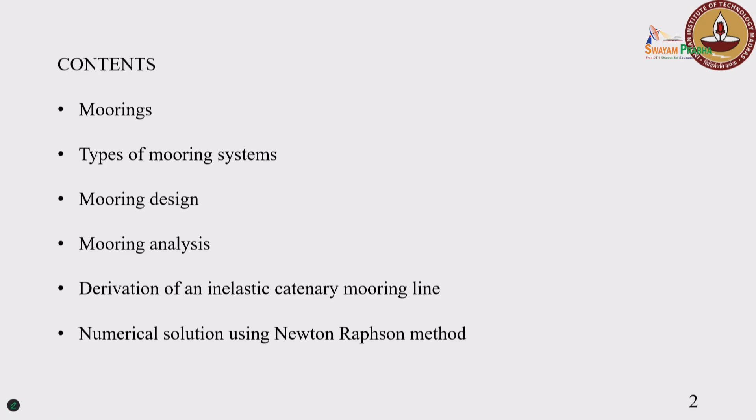So in this lecture we will be having these contents. We will have the moorings. First we will discuss why mooring is required, what is a mooring, and how to design a mooring, and how to analyze it.

And to make it a little interesting, we will have a derivation of an inelastic mooring line and why it is very important and how to solve it.

So finally we are interested in solving the problem, not just discussing the equations. So how a physical problem, when you have it, you convert to a mathematical sense and apply some method to solve it. This is one way to get started.

So this is not a complete part of the mooring itself. We just start with it, but then a series of lectures are required in order to discuss more, to get into the sophisticated tool development.

But then this is an introductory class, so we will have on moorings and why, and all those contents wise we will keep going. And why mooring?

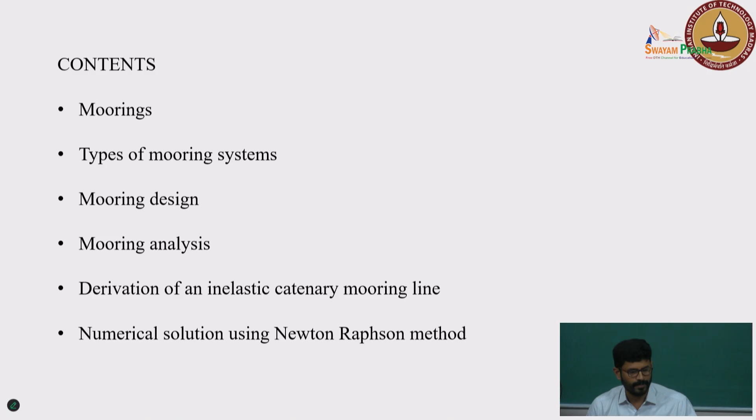So before we get into why mooring is required, in the last couple of classes, as we saw, a lot of wave energy converters we have been talking about. Depending on the types, you can see that oscillating type accounts for 78% worldwide, and OWC, which is the near shore one,

and submerged pressure differential overtopping devices. So it is very evident that oscillating type is much preferred, and presently on the worldwide sense it is 78%. And based on the location, if you see at the bottom, the offshore scenario is basically 64%.

So almost all of the floating wave energy converters, and even your offshore structures, everything is on the offshore.

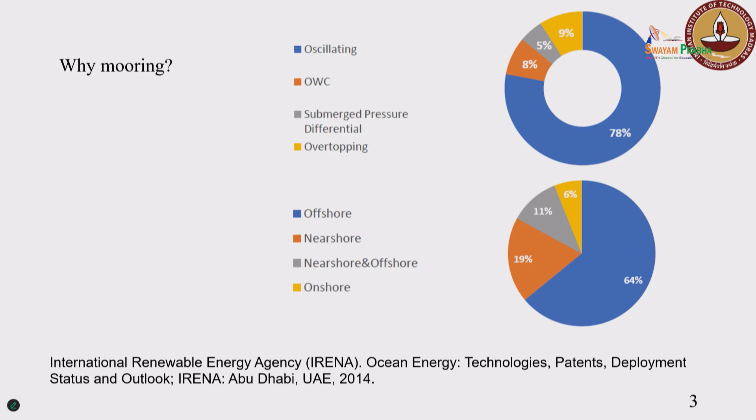So 64% is offshore, and near shore as well, considering the OWCs and other aspects, and there is always a transition from the near shore to the offshore and in between regions, and the onshore regions as well.

So at the end of this lecture, I expect everybody to know what is a mooring, why it is required, how to design it, analyze it, and if somebody gives

less inputs, how to start designing it. You should be able to get some reasonable numbers, and it should lead to a better path.

So offshore moorings, the fundamental role of a mooring is station keeping the floating structure. So I would say they are all the unsung heroes. Basically, many times when you see a floating structure, you don't see the mooring, which is just

like a duck, the legs you don't see, but that is what is helping us to keep it going. The same way, the moorings, the primary aim is to station keep it.

When we say station keep it, it is to keep it in place, but not so restrictively, but then it is a little complex and it can go around a particular range. So I have a nice analogy figure in the next slide, so that can give good clarity and keep

it intact. So moorings are an integral part of any offshore activity, starting from offshore drilling, production, transportation, maintenance, floating offshore wind turbines, and also wave energy converters.

In the last couple of lectures we have spoken more about the wave energy converters and how a physical problem is transferred, and we are mostly talking about the body interactions and setting up the equation of motion, but nowhere we are talking about the moorings coming into the picture and its contribution to the overall response.

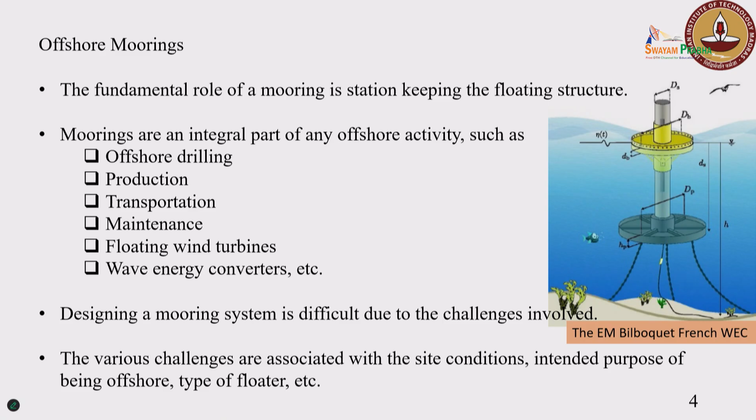So depending on the site conditions and the metocean data, what is the wave height at that location, what is the time period at that location, what is the current - the last session also we were talking about the currents. So it depends on a couple of parameters, and the challenges are there as well.

An analogy, just for keeping us grounded here: this is what we might have seen in our villages, wherein you have a cow and a rope which is tied. Basically, when we tie a cow, we are restricting its motion, restricting it to go around a particular point, correct?

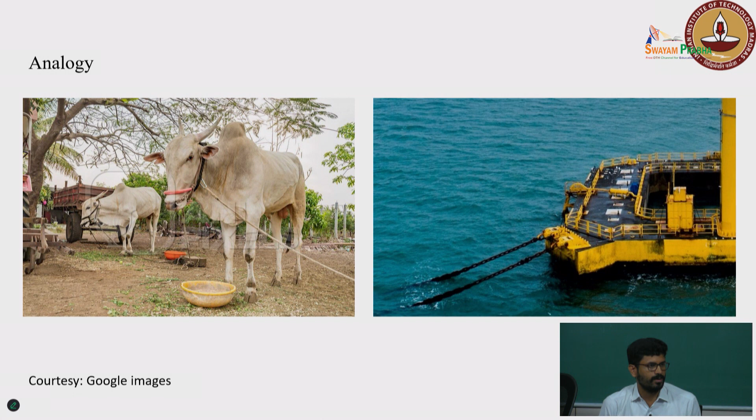So in the same way for our floating structures, for your mooring, one end is connected to the floating structure, the other end is connected to the seabed. And how you make a connection and what are the different compositions, for example in the same figure you can see a wire rope is given. If you put a chain of a very bigger size, your cow cannot take the load, correct? So depending on what type of structure you handle, your composition of mooring will also play a role.

So now we understand that during its course of time, a floater excursions basically means it will move around during its service. So mooring lines are constantly changing their positions as a function of time. That is what we call a watch circle. The watch circle is the extent to which it can go, the circle that it forms — the floater's excursion from the mean position.

For example, on the right side you have a drilling rig and a riser. Generally for drilling operations we don't use moorings, we have a separate item, the dynamic positioning system, wherein you bring in thrusters to keep it in place. So either by having thrusters or by moorings, you restrain the structure in place. So to station-keep a floating structure we can use a mooring or a dynamic positioning system.

It depends on the type of application, whether you want to go for drilling or for production activity. For production activity, basically for 20-25 years is the service life. You start drilling — it's like constructing a home, hardly 6 months, right? So the drilling operation also generally happens for 6 months. After that, for the next 20-25 years you are going to stay there, doing all your operations and extracting oil or hydrocarbons.

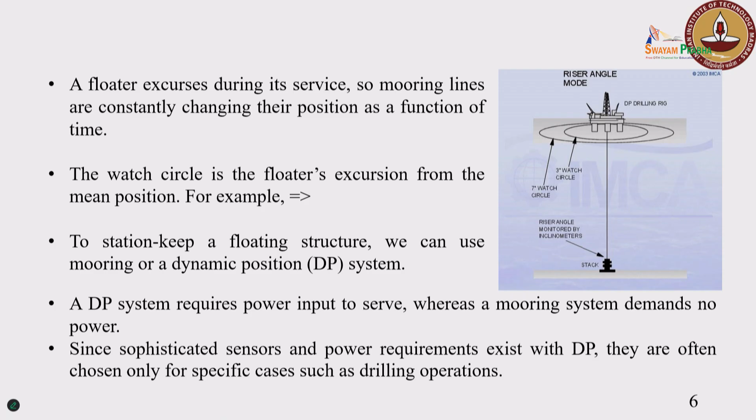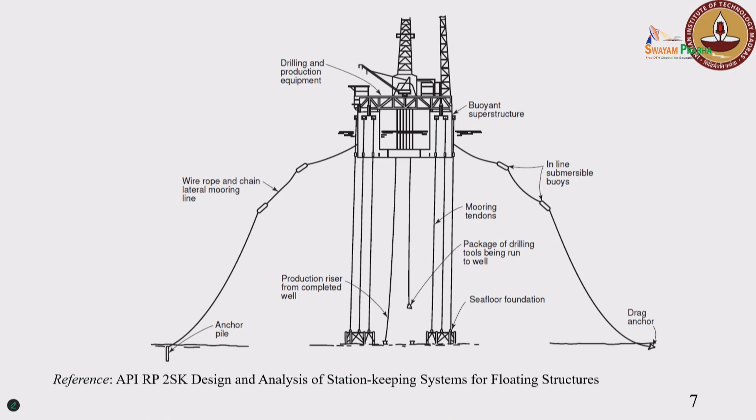But there are some places wherein combinations exist — with dynamic positioning you also have a mooring, depending on the type of requirement, and all these are site-specific activities. Some pictures for interesting things: it's not always that you have a simple catenary mooring or any one, they also come in combinations. That's what we wanted to say, and the reference is also given here.

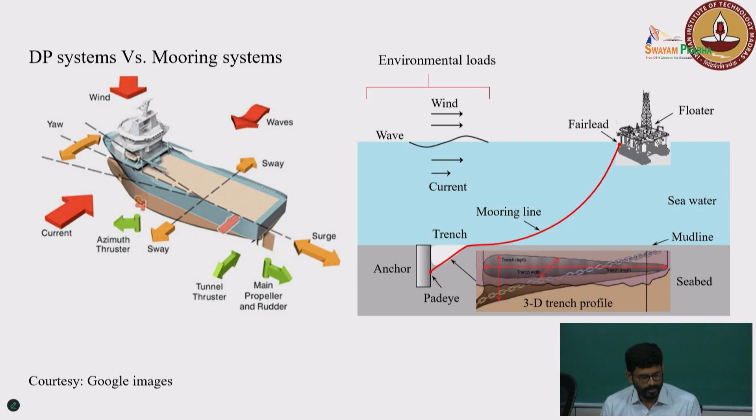So just a quick comparison of the dynamic positioning system with moorings. For the dynamic positioning system, we said we have some thrusters which keep it in place — it senses the direction of the wave and also the wind direction, and based on these inputs the thrusters adjust the power such that it will stay in place. So here we understand that for any offshore structure we have environmental loads: wind, wave and current.

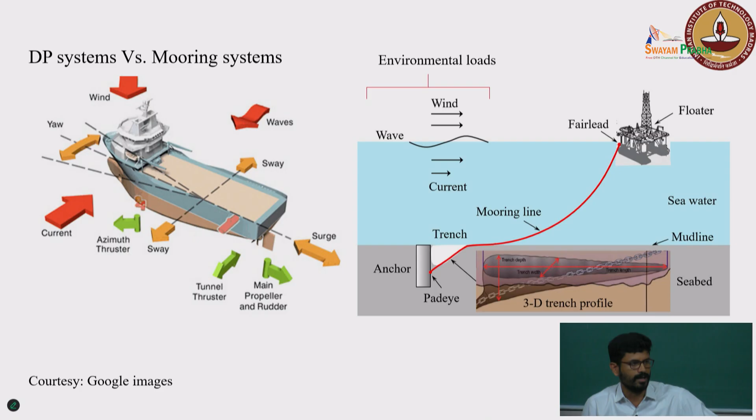You have a floater, and for a mooring, one end is connected to the floater, the other end is connected to the seabed. The one connected to the floater is what we call the fairlead, basically the top point. The other end touches the seabed, runs a few kilometers or a few meters on the seabed, and then terminates with the anchor. That is how it is generally done.

So the mooring limits the floater's excursion to ensure the safety of other systems, because when you are dealing with a floater, it is not just your floater alone. For example, you have an oil and gas platform - it is not just the moorings alone, it is primarily aimed at having other risers and umbilicals taken into picture. So they have some limitations, because of which your floater, though it can go a little bit forward, it can excurse, but then it is restrained.

The moorings are generally designed for various conditions, from harsh environments like the North Sea to mild environments, like the Gulf of Thailand or offshore West Africa. So different regions have different metocean data, and based on that only the moorings are selected.

So as of now we know what is a mooring and why it is required. Moorings are primarily meant for station keeping, and the design basically depends on where it has to operate. So the mooring types are based on the following, and also whether you are going to have it for a shorter time or for a longer time duration.

And also the profile, whether you want to have a catenary mooring or taut mooring. So it is basically an iterative process - we don't stick to any one. You start with one set of physical parameters, then you iterate it. Profile wise, we have the catenary and the taut, and also there is one more, semi-taut.

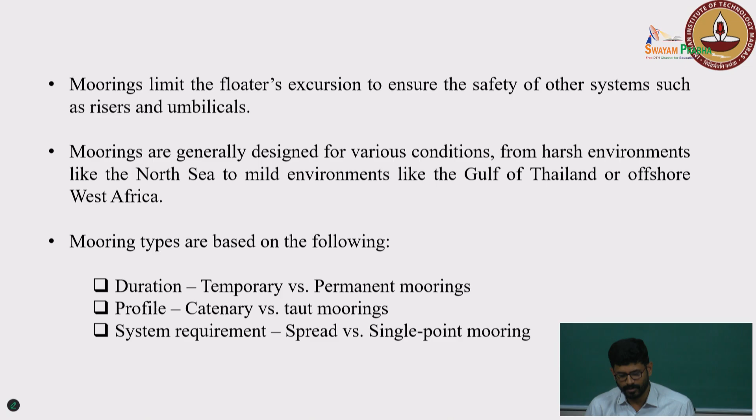System requirements as well, the spread and single point mooring. So mooring type based on the profile, you can see catenary versus taut moorings. For shallow waters, much of the time you see a catenary mooring. So when you have a floater and there is a set of lines which is running from your floater to the seabed.

So why is it taking a catenary shape? When I am just going to hold some kind of a line here, for example this line, it is basically taking some shape. Why is that? Because of the self weight. But in case of these, these things are already submerged in water completely. So it is basically the submerged weight in water, because of which you are getting the catenary shape.

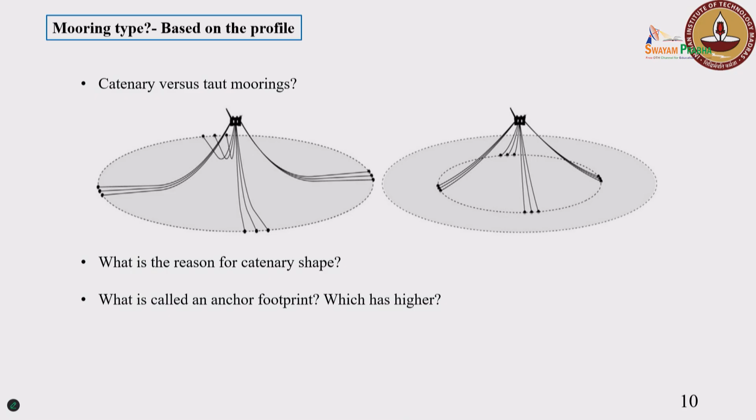And what is called an anchor footprint. So now we discussed about watch circle, which means that it can, as the cow can go around that point. And where it is connected, the end A is connected to the floater, the end B is connected to the seabed, and it is all connected. If you see it in a plan view, you basically have some circle, what we call an anchor footprint.

Okay, so now there are a lot of new terms coming up: watch circle, anchor circle, and what has to be the composition of it, and how to choose all these things. So that is a question now. We have a lot of things to play with, and whatever you choose is a correct one or not, we actually don't know.

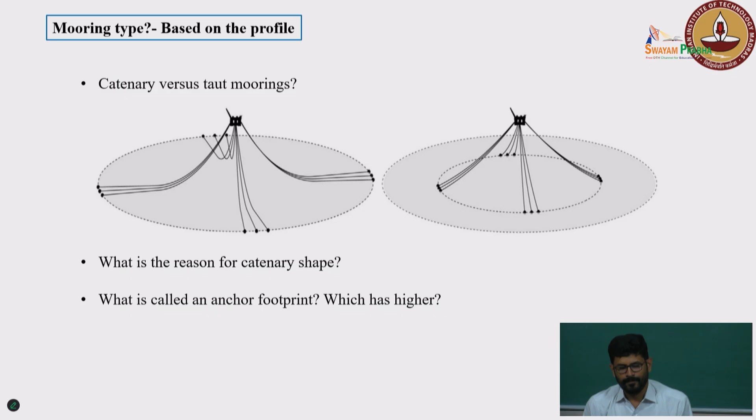We start with some physical parameters, then you go for iteration, then you say that it is satisfying all my requirements, and it is also cost effective. Finally at the end of the day, what we want is to invest less but no compromise in the performance, correct? Whenever you purchase a product, the same mindset - you want to invest less, but then the performance should be great enough. The same procedure goes in the mooring design and analysis as well.

So now we will quickly see what are the different types and why different types are there, and on what basis you choose this. So spread versus single point mooring. Spread mooring generally for the permanent - when we say permanent, nothing is permanent basically - so the 20 to 25 years service life, that is what we call a permanent activity.

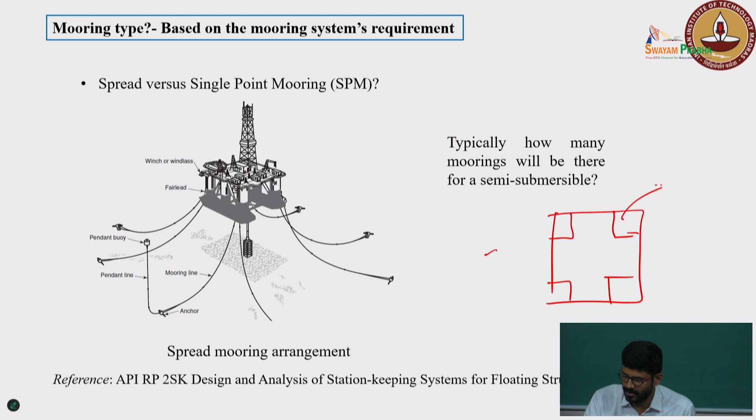So typically how many moorings will be there for a semi-submersible? For example, let us take, you are aware of semi-submersibles - basically a floating structure with columns and pontoons. So let us take, if you have 4 columns, for example, let me put it in the plan view. So this is basically your columns in the plan view. And now if I don't have any moorings, over a period of time they get drifted off.

So I need to have some moorings in place. So now how to put a mooring here? That's a straight question. So when a layman starts thinking, we initiate the same way, but then we refine it, correct?

So now either I can have 1 or 2 moorings per column, correct? If I am going to have only one, so it will be 4 cross 1, right? 4 columns, 1 per column. Or I can have 4 cross 2, 4 cross 3, depending on the requirement. So what will happen if I travel this way, 4 cross 1 to 4 cross 3? If I go for 4 cross 3, it will have better performance, right?

Because you have 3 moorings running. But then what is the disadvantage? Because you might have invested more, right? So now we will revert back to 4 cross 2, right?

Whether I can use 4 cross 1, that is a question now, right? If there is 4 cross 1, assuming you have only one mooring line per column, if that gets damaged, there will be a greater offset, the excursion will be high enough. So we cannot choose 4x1, and we cannot go for a higher number of moorings either. So we have to start with some number, then slowly refine it. That's how it is generally done.

Okay, so this is for spread mooring, basically you are spreading over your complete structure. So this is basically a spread moor, right, spread mooring, whatever we are doing here is a spread mooring.

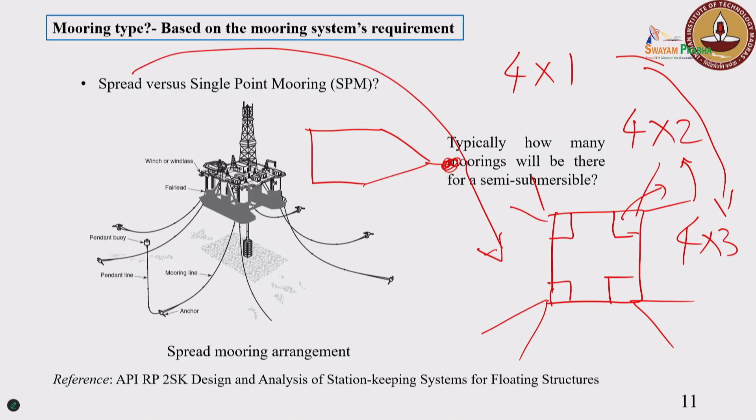So in that there are two types, basically external turret and internal turret. So what is the advantage by going for a turret system? Basically it will help you for weather vaning.

So when we say weather vaning, you have a floater, and assuming that your connections are made here, and now the direction of wind and wave comes in this direction. What will happen? This will slowly align its position. So now, in the direction of your wind and wave, it will align itself. It doesn't need to take all the load, it can bypass it, leave it aside. So this is what we call weather vaning.

So this single point mooring is much preferred for ship shaped vessels. The weather vaning fundamental idea is to reduce the impact of the environmental load on your floater, whereas in case of your spread moor, whether you like it or not, the environmental loads will continue to persist on the structure.

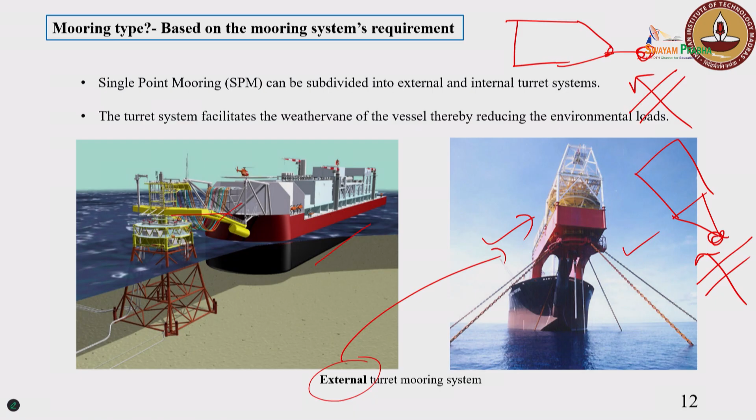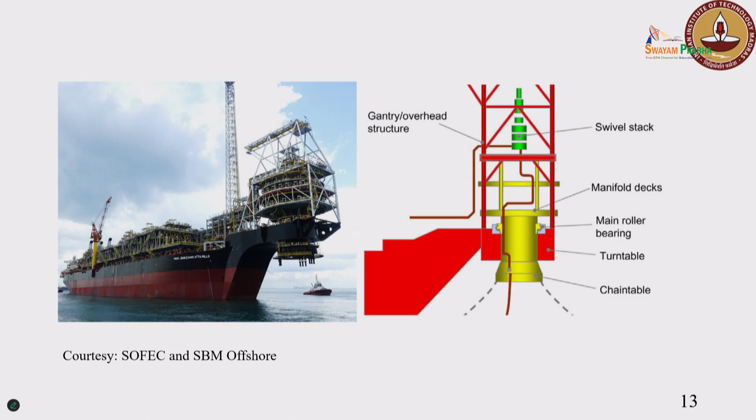Much of the time you see in the real world people adopting the external turret system. So this is also an external turret system. So then how is this staying in place? So now the question, you can see that moorings are outside, this is a single point mooring we say, basically it is outside, all these things are outside.

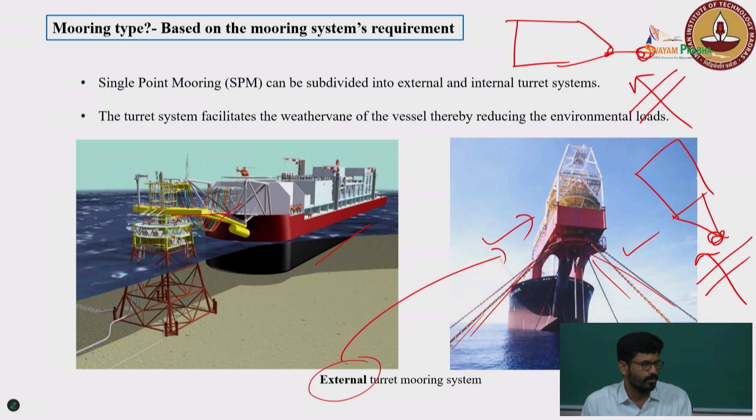Till now we did not say how a mooring is being made, whether it is a chain, wire rope, or polyester rope. We will come back to that. We say mooring is some kind of a line element which is helping us keep your floater in place, so that is what we are talking about.

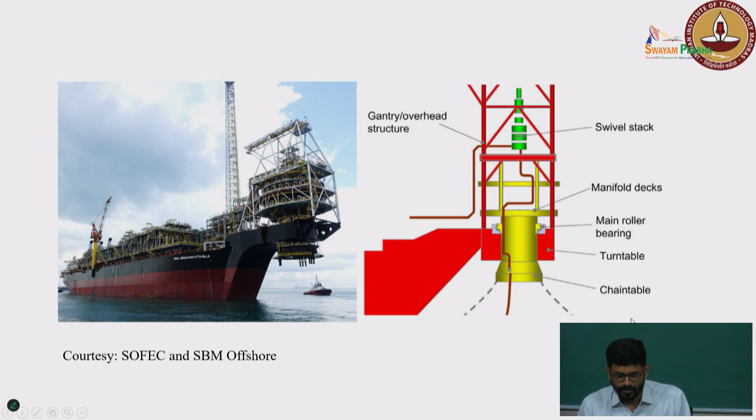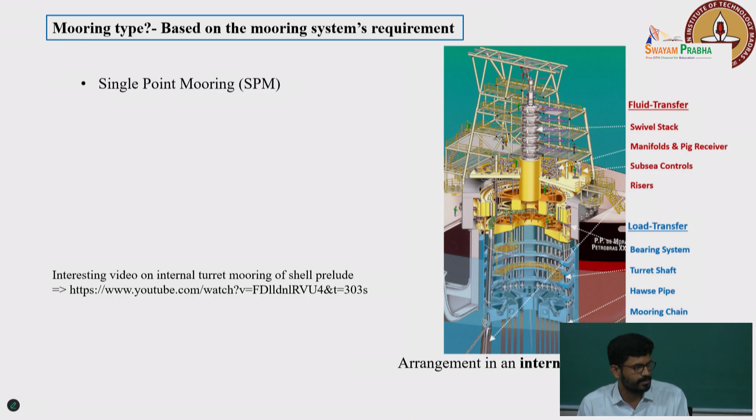Okay, so all these things, some figures for quick catch. So this is also an external turret. So now this is an internal turret arrangement. As we said, for an internal turret you need to have a dedicated space, and also a lot of complex systems come into picture, because it has to allow for the swiveling of your floating body.

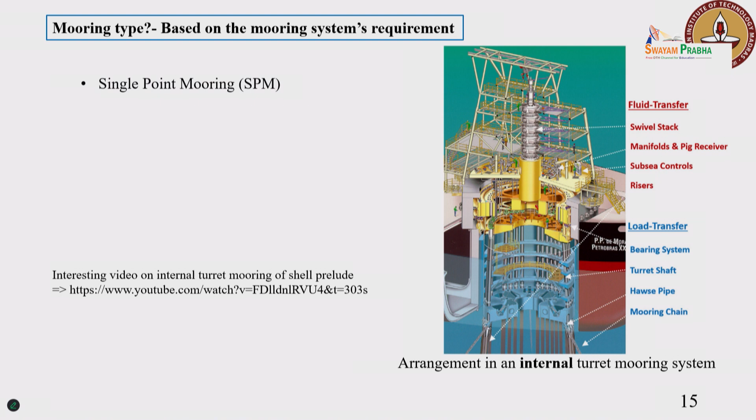When we say weather vaning, we basically mean that swiveling of your floating structure so that it will align to the direction of wave. So this is an internal turret system. You can see a lot of bearing systems and other things which is coming within your floating system itself.

Okay, so all these pictures are basically from your DNV course, I will give the reference so you can have a look at it.

For example, next 2 weeks the weather forecast says that some inclement weather is there. So what you do, you want to evacuate the place. Quickly I will disconnect from the system, I leave it in place so that this has some kind of a buoy. In the water line you have some kind of a buoy. This will try to go up, whereas your chains which is connected to it will try to pull it down. So they will come to some equilibrium position and they will be there.

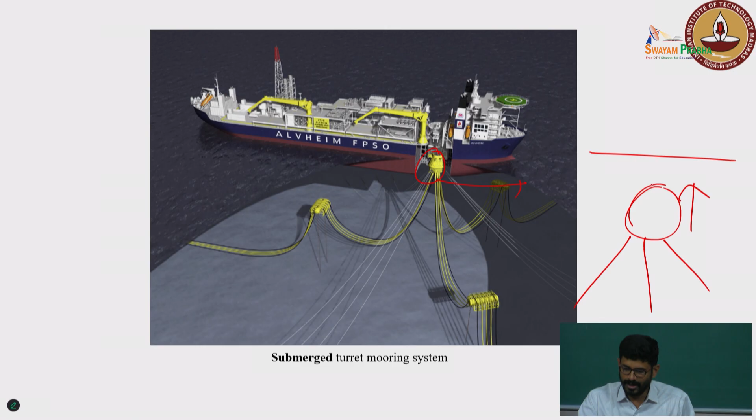So once the weather subsides, after 2 weeks, cyclone or whatever is gone, they will come back to the same site and they will use some kind of a messenger wire to pull it back and make a contact with it, so that it will stay in the required place.

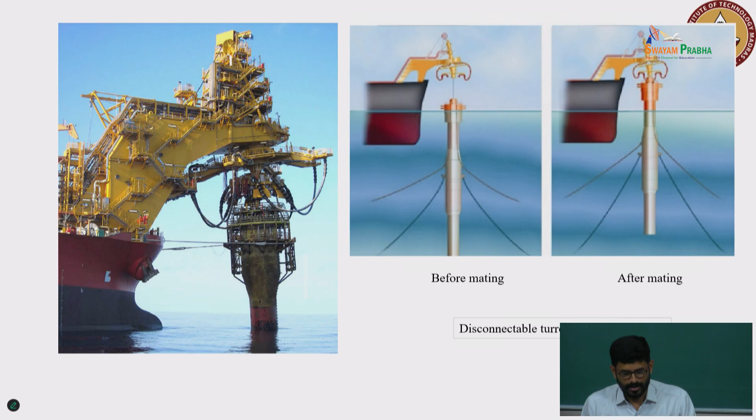So this is the disconnectable turret. You can see in the event of harsh environments, they will disconnect it, they will evacuate the place. Once it subsides, they will come back to the same place and they will use a messenger wire to make a connection to the floater again.

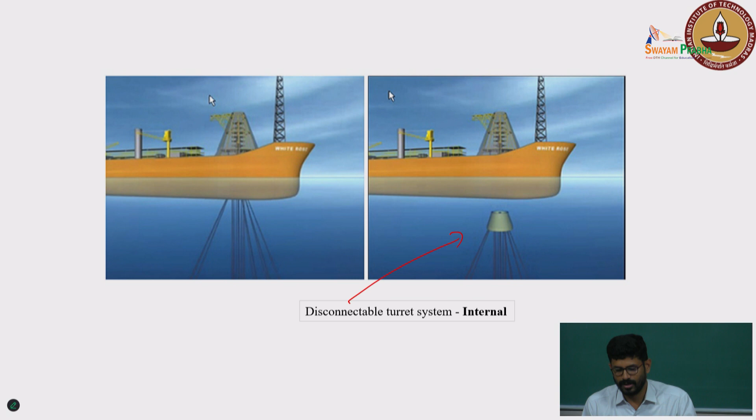These are some of the variants we have, the disconnectable turret system. So all these things are disconnectable.

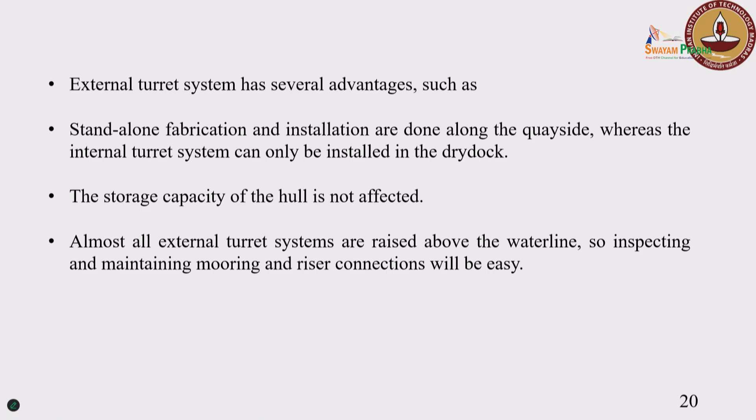Okay, so now we understand external turret systems, so what to choose is a question. The external turret system has several advantages, such as standalone fabrication and installation done along the quay side, while the internal turret system can only be installed in the dry dock. So these things will add up to the overall cost of the project.

When you take a project, we try to see the items to give optimal performance, the best performance, but then with minimal investment. So that is the thought process with which the client also approaches.

The storage capacity of the hull is not affected. In case of an external turret system, almost all external turret systems are raised above the water line, so inspecting and maintenance will be easy. So that is what we said.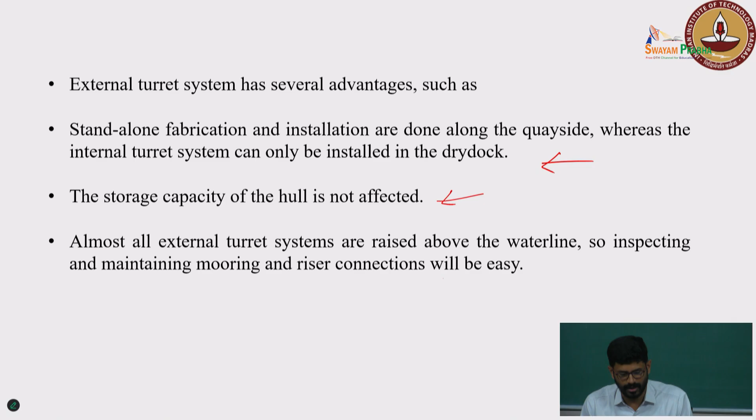So just a summary, and again different types exist. The catenary anchor leg mooring system, wherein you have a buoy, this will be connected with a lot of mooring chains. Many times if you go to the port, you happen to see a few vessels that we do not bring into the port, we try to deal with them outside the port itself.

For example, you have an LNG carrier, you generally do not let them into the port, you keep them off. The reason is, first thing, it is highly inflammable, you do not want to take any risk, you want to keep them off the port. In such scenarios, what are the different items that come into picture?

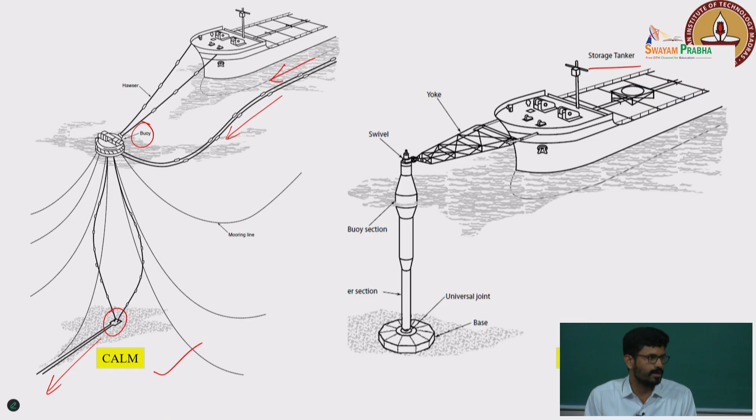So the selections could be either the CALM or the single anchor leg mooring. You can also see some kind of pipeline connected to buoys, basically for the connection, wherein you have a pipeline end termination that will travel all the way to the shore. Some items here include the storage tanker, and if your floater or vessel is very big in size, you cannot bring it inside the port because your turning circle, your turning radius, will restrict it.

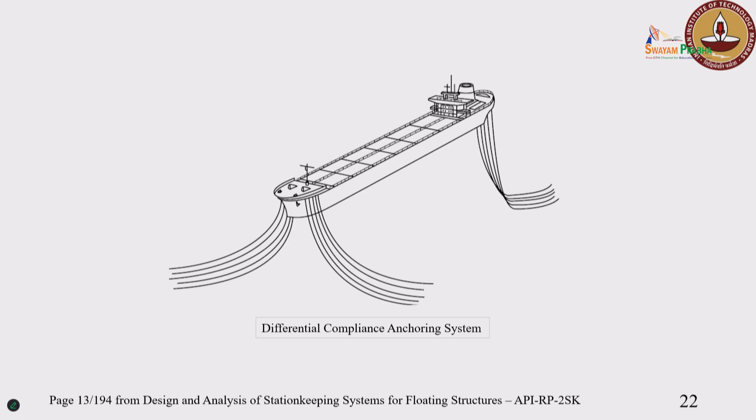Regarding differential compliance, whether we are talking about spread mooring or single point mooring, we don't necessarily have to always stick to that. Many times, for example, when developing a particular site, things get developed over a period of time. For a ship-shaped vessel, you will not have the loading uniform throughout - lot of risers will run from one side while the other side is empty. In such a case, I cannot go for spread mooring. I have to be a little biased because these risers will try to pull it down, causing a tilt to the vessel. So I need differential compliance, where one side has more mooring lines and the other side has fewer.

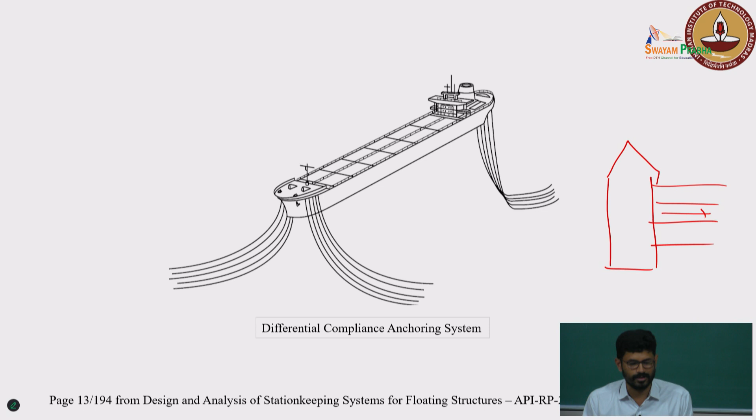Mooring design basically is an iterative activity, as we said. Now we understand there exist a lot of parameters we have to consider before starting the design. First, get clear information from the client on what needs to be done. Collect project information, and also where it is going to operate - environmental conditions - and create load cases: what is the maximum load, maximum wave height, and time period that will come during its service life. That's what you do, and how much expense you will always be prepared for. All this information is required to properly design your mooring.

We also carry out hydrodynamic analysis of the floater, because your floater may have a natural period matching the site's natural period - the site's most probable wave period. Let's say for a given site the most probable wave period is 15 seconds, and if your floating body's natural period is also 15 seconds, then they will always be in resonance - it will behave very violently. So you must have the hydrodynamic analysis done beforehand so you know how to position them, because that comes as an input - all your moorings are connected to your floater. When your vessel moves, that transfers the load to your mooring, and it travels all the way to your seabed. So it depends on your floating body as well.

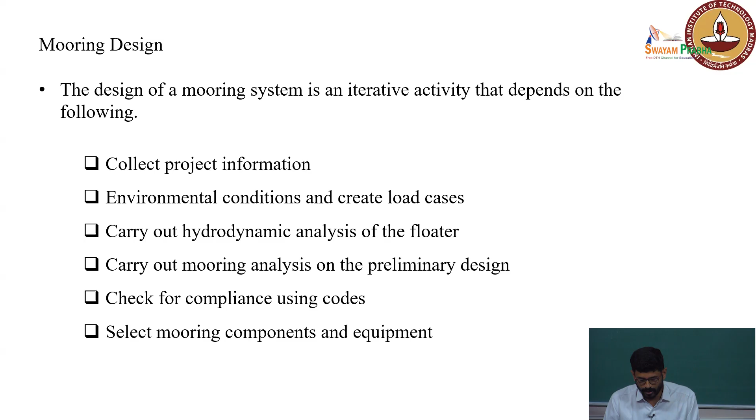Carry out mooring analysis on the preliminary design, check for compliance using the codes. Whatever we do, we have to comply with the code - this is a standard procedure for all engineering activities. Whenever you design something, it has to comply with the code. The code books are nothing but a compilation of past experiences - what are the do's and don'ts. So sometimes you'll see a lot of empirical relations, like 1.5, 3.5. If you ask where that number comes from, it's basically based on past experiences - joint industry practices across different companies that evolved and got summarized. So it has to comply with the code, and also selecting the mooring components and equipment.

Now, the mooring design process - as of now we understand mooring is required. Mooring is really necessary to keep your floater in place, but to make a selection, a lot of other parameters have to be taken into consideration. That's what we saw. Till now we did not get into the composition, what other things come into picture, and what sort of loading comes into picture as well.

So we will see here. The design process of a mooring system depends on the following factors.

First, you select whether it is a spread mooring or a single point mooring. Then your profile, because if you are going to have a catenary mooring, you will have a larger excursion. But then the advantage is that you don't need to worry about the selection of your anchors, because it is very far from your touchdown point where it is going to make contact. So there is always a trade-off. If something is good, it will have an impact on the other.

For example, if you have a catenary mooring, you need to have a very large length, so you are going to invest more. In case of a taut moor, you will have a much shorter length. But what is the disadvantage? You need to make sure the point on the seabed has a very good connection, it should not come out. So there is always a trade-off between the different quantities we talk about.

Then the mooring pattern, what should be the anchor radius, and how many lines I have to choose, whether I go for 4x1, 4x2, 4x3. And also the spread angles, the angle between the lines, what should be the angle between them.

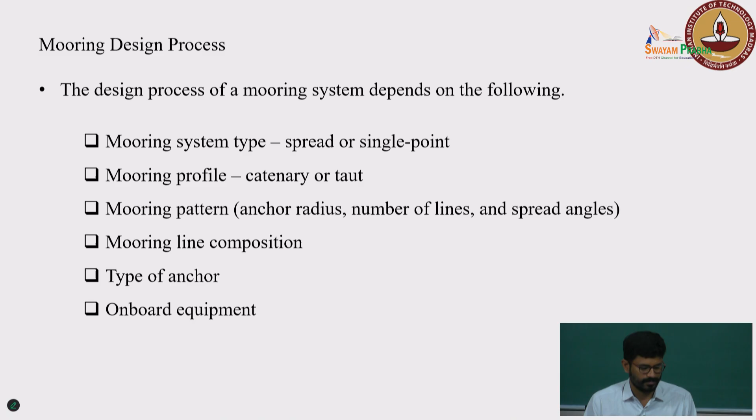Mooring line composition, for example, if the water depth is 10 meters, you can hold some chain or something. But if your water depth is around 1000 meters, even then you cannot do just anything, because the top tension will be very high. So we need a different composition in that case. We will see that, and also what has to be the type of anchor and on-board equipment.

Now you can see the figure showing how the operations have fared over the decades, starting from the 1940s, 1950s, slowly increasing. You can see the number of floating structures has increased exponentially. So many structures are operating in deeper water and ultra-deep water. When they are operating, moorings are definitely there, and there is a set of activities being done. That is the importance of mooring.

And what is to be selected, whether catenary mooring or how to have the composition. Here you can see that for shallow water depth, which is water depth less than 400 feet, we also express this water depth classification in non-dimensional form, h by lambda. Anyway, for people who don't have an ocean engineering background, generally they say if it is less than 400 feet, that's in meters around 130, 100 plus.

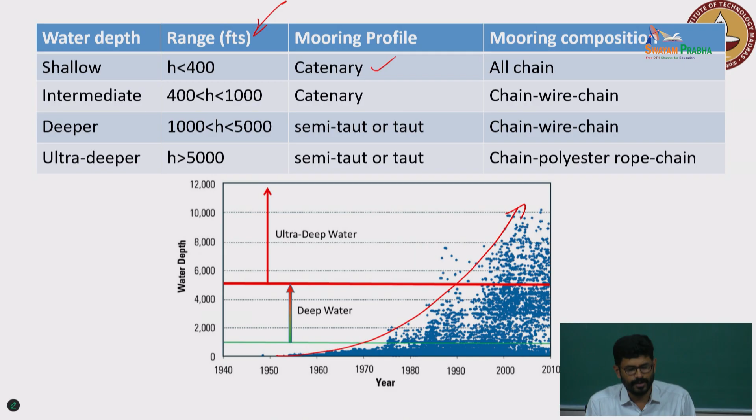So for shallow water you can choose a catenary, whereas for intermediate water there is always a transition from catenary to taut mooring. And for ultra-deep waters you don't go for catenary at all.

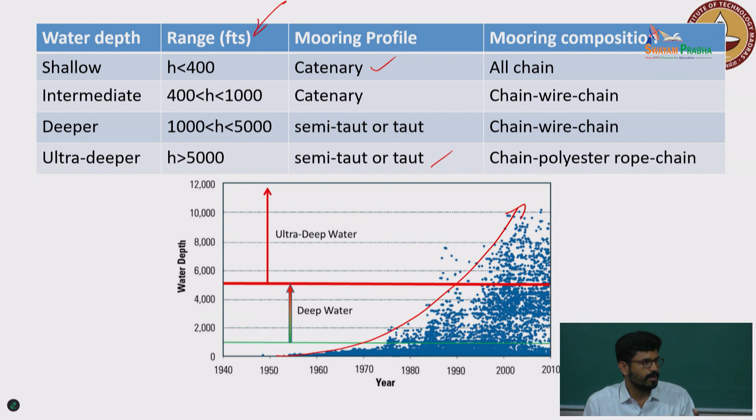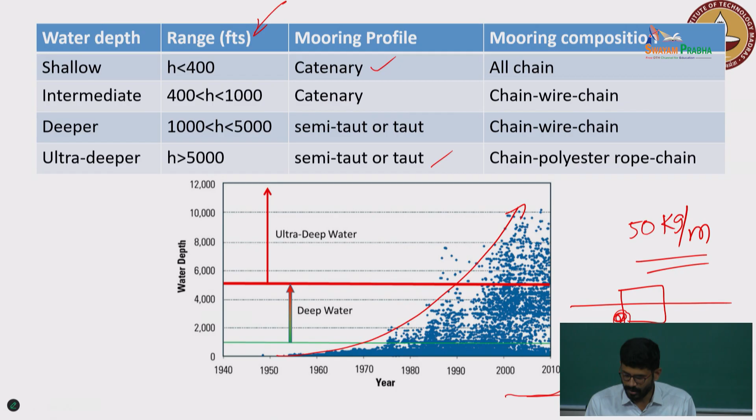Because if you go for a catenary mooring in ultra-deep waters, say 5000 feet, for example, let us take the submerged weight of your mooring line as 50 kg per meter. At 5000 feet, just imagine what the top tension will be. This is my floater, and this is the line, and this is your top tension, the fairlead, that's what we told. If the water depth increases, your fairlead tension will be very high, because the suspended length is increasing.

So you need a different composition such that this tension comes down, because you cannot avoid moorings, you must have them. But we find a way to reduce it, that's the maximum we can do. So if your mooring line is 50 kg per meter and the depth is around 5000 feet, the top tension will be very high. In that case, instead of having a mooring line with this single property and weight, we try to come up with different lines and combine them. That can be done.

So that is why the chain-wire-chain mooring composition is preferred. The reason is primarily aimed at reducing the top tension. If you don't do that, and if you have a complete chain itself, because of the self weight itself it will fail, it will start yielding. So you need to find a different way. That is why we have the initial part as chain, then wire rope, and then chain again.

Okay, so now we will take a quick question: why are we going to have chain on the seabed? So now we said that for deeper waters and ultra deep waters we are going to have a different composition, correct? Chain, wire rope, chain, or chain, polyester, chain, right? Again, why should you prefer to have chain at the seabed?

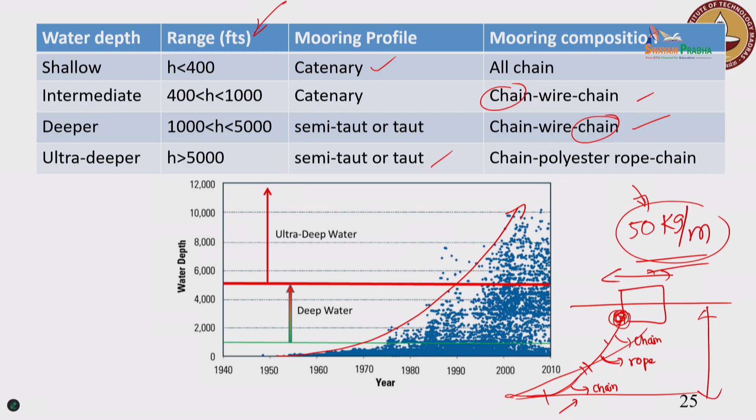So you can see that when your water depth is very less, we told that catenary can be used because the top tension is not going to increase much. For example, 20 meters - assuming 20 into some catenary factor 1.3. Let us put it this way: you have a floating structure, let's take 20 meters of water depth only. We told we will not go for a composition, we will go for a complete chain only. So this is your water depth, 20 meters, but then we multiply it with some factor, what we call a catenary factor, basically to account for the fact that from your TDP it is not just a vertical line, it is going to be an inclined line. So there is a factor we multiply, catenary factor, so 20 into 1.3, correct.

So now what should be the length on the seabed? That is the question. If my length on the seabed is very less, and if this floater is going to move in this direction, quickly they will come into tension, and that load will act on your anchor, which you are not interested in. You do not want to transfer more load to the anchor.

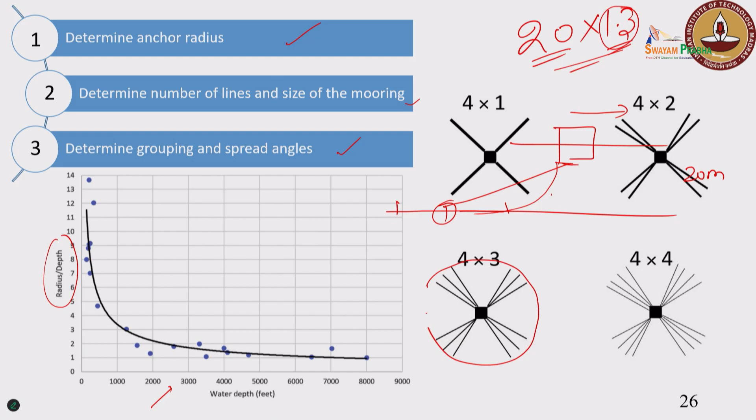Now selecting the anchor radius. This is basically your anchor radius, from your mean position to where it terminates. This anchor radius to depth ratio is not a fixed number, it changes depending on the water depth. For increasing water depth, it approaches 1. But when dealing with a floating structure in shallow water, you cannot have your anchor radius the same as the water depth. For example, if the depth is 20 meters, you cannot say the anchor radius will be the same, you cannot have it that way.

So you need to have an increased length on the seabed. Why? Because just in case your floater excurses, you will have a larger length that has to be lifted, and only then will that give the restoring force for your floating body. That is the main aim.

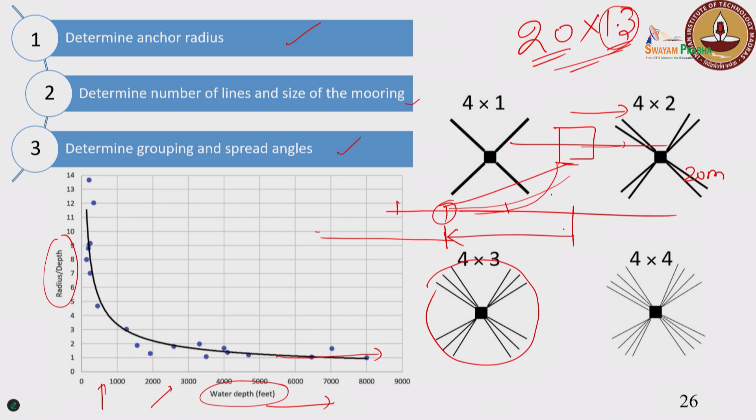In summary, some key points to take into account are: for shallow waters the anchor radius is sufficiently large, which makes sense because as the floater excurses it has to lift that much amount of chain, giving you the restoring force. Also, having a higher line length on the seabed ensures no uplift on the anchor.

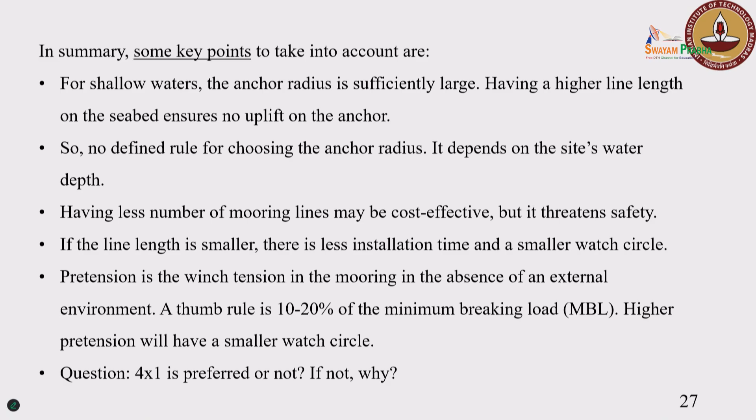So there is no defined rule for choosing the anchor radius, it depends on the site's water depth. Having fewer mooring lines may be cost effective, but it threatens safety, especially if just a single point is connected. For example, think of tying up an animal, if you do not put a single rope but instead 4 or 5 ropes connected, the reason is you want to ensure it stays in place. The same way, having fewer lines may be cost effective, but it threatens safety.

If the line length is smaller, there is less installation time, as in the case of taut mooring condition. When we say taut mooring, there is no line length on the seabed. When we say catenary, a few meters of line are on the seabed, whereas in taut mooring there is no line length on the seabed. So if the line length is smaller, you will have a smaller watch circle, and you quickly get resistance from the anchor point where it is connected.

Pre-tension is basically the winch tension in the mooring in the absence of external environment. So when we say pre-tension, we mean what is the top tension without the presence of any load. For example, with a floating structure, you simply have a line, and this length is suspended, which is going to have a downward loading, because of which there is always some kind of tension. This is what we call pre-tension, in the absence of any external loading.

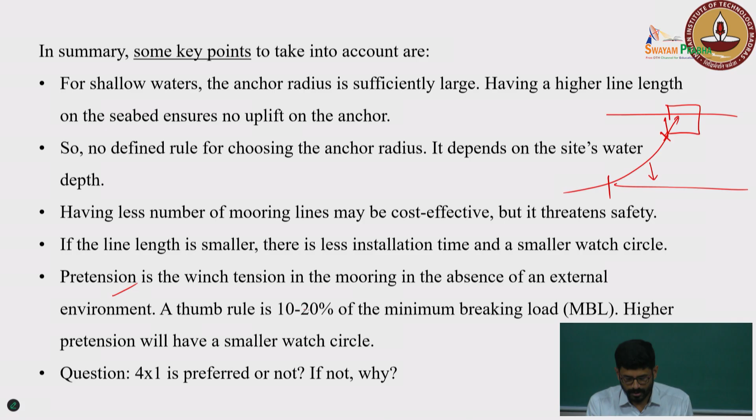When you choose it, it has to be such that it falls in the 10 to 20 range, these are all thumb rules, there's no strict defense for why you should choose this way, you can always take a different number. But then finally, when you do extreme analysis and fatigue analysis, it has to comply with them. If you are able to satisfy it, you are good to go. There is no single solution, multiple solutions exist for a given problem.

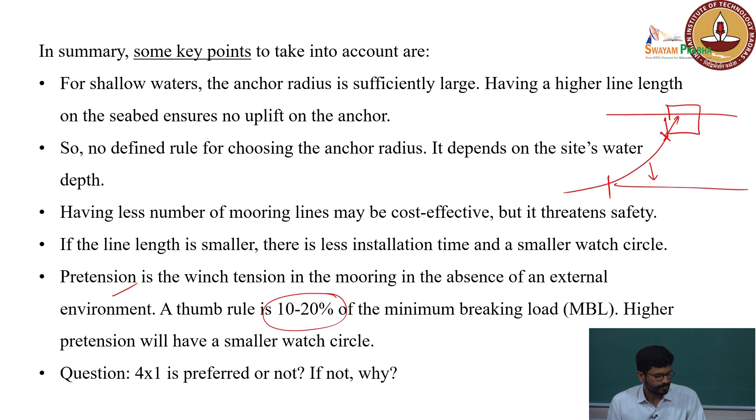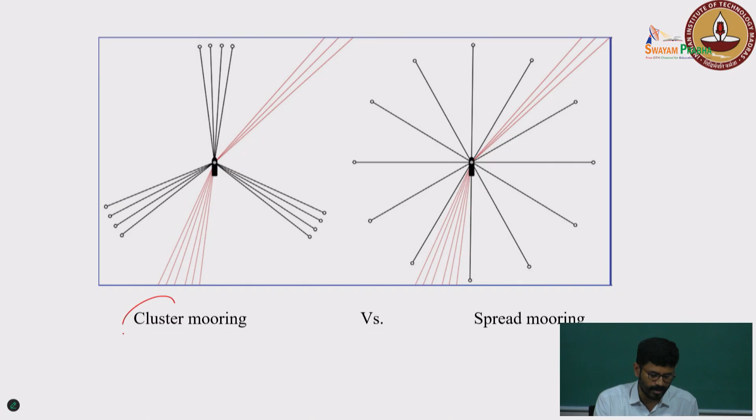This is also a spread mooring only, correct. So when you have a floating structure, you spread it over your complete floater. It is distributed on the floater, but then sometimes we prefer to cluster them, group them. When we say cluster, we are trying to group them. This is what you most of the time see for floating offshore wind turbines or wave energy converters, because it is relatively easy to handle compared to a full spread. For example, if I group it here and want to make any changes, it is easy for me compared to having a complete spread over the structure itself.

They generally come in, for example in a spar also you can have similar items, and this is what we call the internal angle - generally 10 to 20 degrees, the angle between the lines. Why 10 to 20? There is no defined reason, but that is how the conventions or existing practices are.

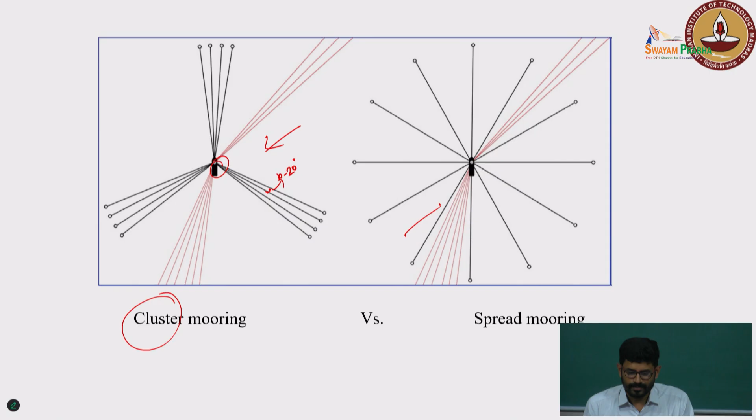Now the mooring design process. We understand that a mooring line cannot be a single item - it cannot be chain alone, it cannot be wire rope alone. It has to come in combinations depending on the water depth. In shallow waters we use chains. In deeper water, if you use chain, what happens? Your top tension will be very high, because of the self weight it will fail. So to avoid that, we go for a combination - chain, wire rope, chain, or chain, polyester, chain again.

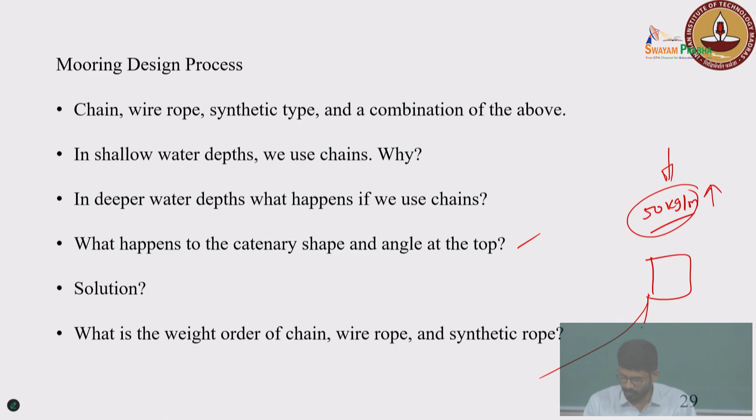So what happens to the catenary shape and angle at the top? If your weight is going to be very high - say 50 kg per meter, as we said earlier - what we mean is per meter length, what is the weight of your mooring line. Generally when you purchase it from a vendor, he gives the weight in air, so you need to find out the weight in water - minus the buoyancy, you get the weight in water. If this weight increases, instead of the catenary being this way, it will become more of this other sort.

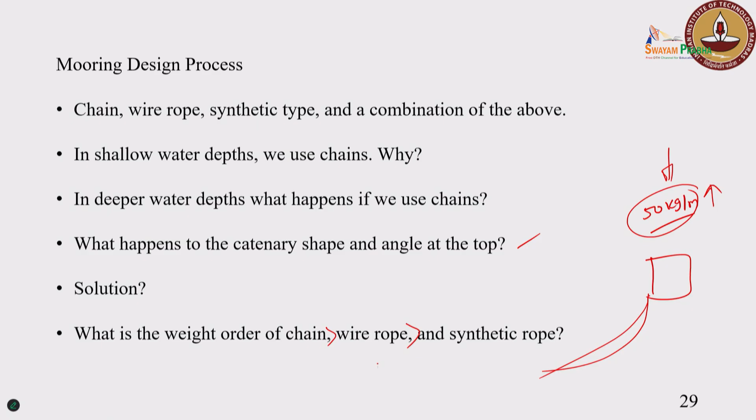So what is the weight order of chain? Of course the chain will be higher - the chain will always be greater, then wire rope, then synthetic. This is the order in which it will be there.

So as of now we understand that moorings are an integral part. Just a quick summary - moorings are an integral part of any floating structure, whether floating offshore wind turbine, wave energy converter, or oil and gas platforms, primarily aimed at station keeping. Then what else did we see? The different types of mooring patterns, and depending on the water depth, whether you have chain, wire rope, chain - this is what we have been saying.

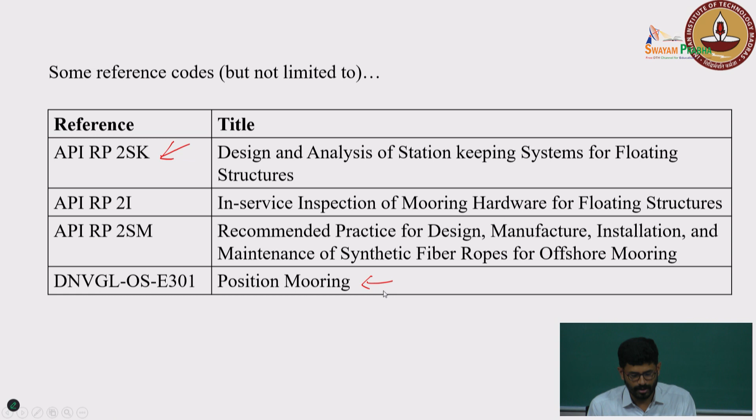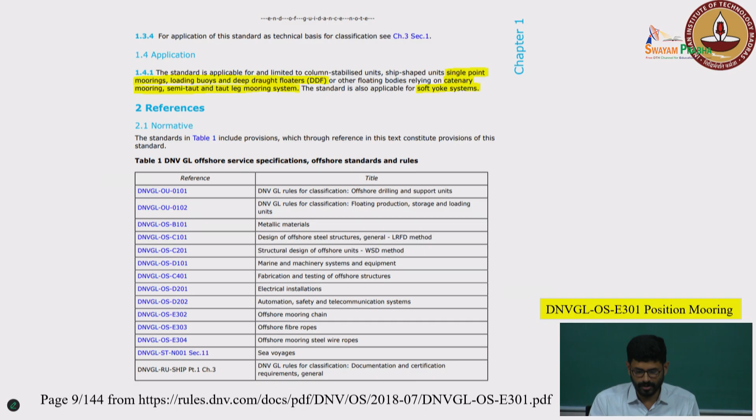All these things comply with some standards - some reference codes. Primarily we use API RP 2SK, design and analysis of station keeping systems for floating structures, and other supporting documents such as DNVGL-OS-E301 also come into picture. The beauty of all these code books is that you will never get a straightforward answer. You read one thing, they say take deviations, refer that one, and when you go there it doesn't end - they say go refer another one. But if you are able to integrate them and connect all the dots, that will give good clarity.

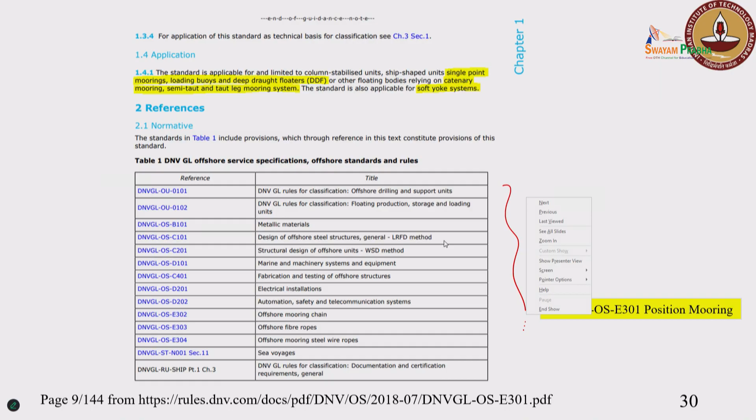And also there is a quick summary about the other relevant codes. We did not discuss what material the mooring is made of - that's also an important question. And also whether that material has to comply with some standard. You have started with the mooring, it is made of some material, that again has to comply with some standard, and it has to be certified, only then can it be supplied for an offshore scenario.